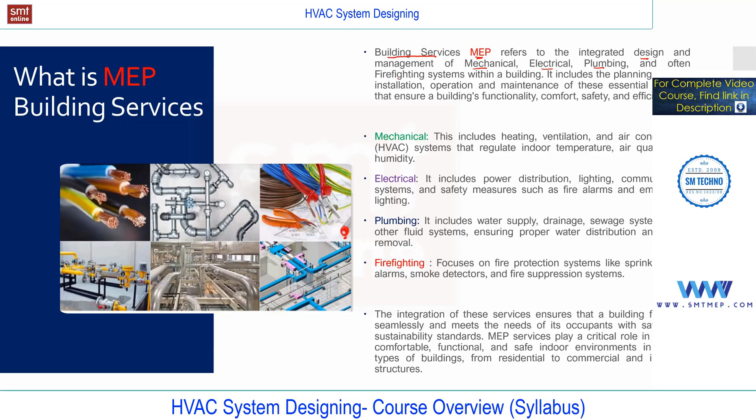So I'm going to share the screen. You can read MEP on the screen. In short, we used to call MEP mechanical, electrical, and plumbing, or building services. This building services, in short MEP, refers to the integrated design and management of mechanical, electrical, plumbing, and also the firefighting system. It includes the planning, design, installation, operation, and maintenance of this essential system to ensure the building's functionality, comfort, safety, and efficiency.

For example, if you talk about any building without these services, there is no use of the building. For example, a building without electricity, or just visualize a building without the plumbing system. So these services are very, very important for the building. In short, we used to call it MEP.

It's a building services, and under this you'll find four services. One is mechanical, under mechanical you'll find HVAC. In short, we used to call HVAC heating, ventilating, and air conditioning. E is for electrical service; under electrical you'll find lighting, power, and alarm, emergency lights, etc. Then P stands for plumbing, so in plumbing you'll find water system, drainage system, fixtures, and lot of things. So altogether we used to call this MEP, total four services combined together.

Now listen, this is important. If you're learning HVAC, you are learning a part of MEP. As a mechanical person, it's recommended to start with HVAC, and as electrical, it's recommended to start with electrical. Later, electrical people also get involved in mechanical services, and mechanical engineers also get involved in electrical services, for coordination. The reason is all these services are for the building, so the electrical engineer must coordinate with the mechanical engineer and vice versa, and all this is linked with the architect. Who is the architect and how the process goes in actual practice, we'll discuss in chapter 1.

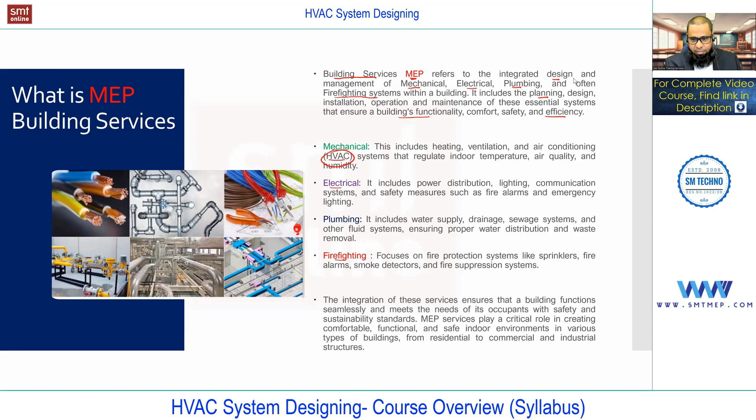In the next slide you will find information related to HVAC. HVAC in short, we used to call it heating, ventilating, and air conditioning. And if you talk about HVAC, you'll find different societies like ASHRAE, ISHRAE, and you'll find carrier, SMACNA, and a number of options. When we start the course, we'll talk about these standards also. HVAC stands for heating, ventilating, and air conditioning.

This is used for what? To control the indoor environment conditions. At this level, I'm just giving general information; in detail we'll discuss in chapter 1, starting with the definition of air conditioning. HVAC refers to the technology and systems used to control indoor air environment or conditions, including temperature. We maintain parameters that include temperature, humidity, and air quality. Under air quality, you'll find velocity, distribution of air, noise level, etc. You'll find a number of parameters that we'll discuss in chapter 1.

This is just an introduction for various buildings and structures. This HVAC is not only for residential; this HVAC system is for residential, commercial, and no doubt industrial. And not only for human comfort, this is also for process control. So you'll find a number of applications for air conditioning, for example in residential projects, commercial projects, as well as industrial, and especially in process controls you'll find this HVAC.

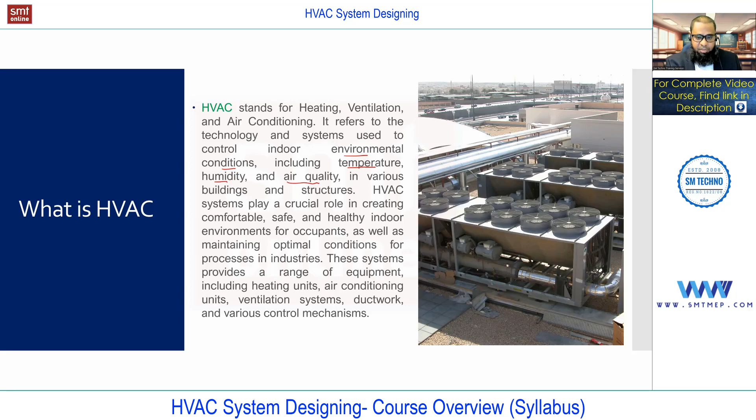Okay, so this is just a quick idea. As I said at the beginning, in this session you're going to learn what you're going to learn in this training program. I'll give you a brief idea about the syllabus.

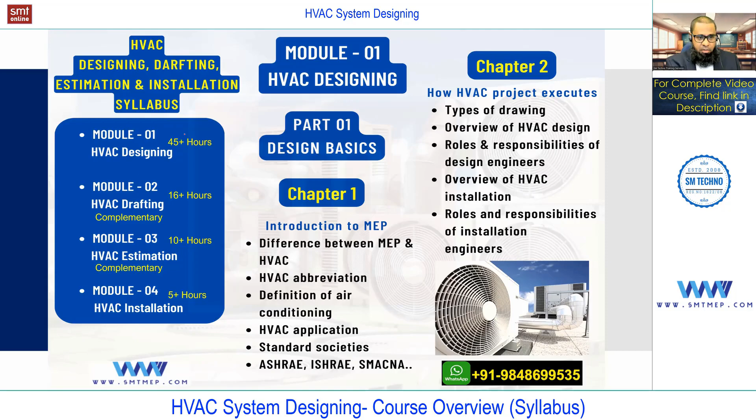Now, if you talk about the modules, this course is divided into 4 modules. You see module 1, I'm considering as HVAC design, which is for 45 plus hours, the major part of this training program. And module 2, I'm considering HVAC drafting, including AutoCAD. It's around 16 plus hours, 7 hours of AutoCAD and 9 hours of drafting. And this we are offering as complimentary, and this is complimentary even for others, not only for you.

You can find out on our website. So this is the video mode. And module 3, I'm considering HVAC estimation, and this also 10 plus hours with the complete tower project step by step with the notes and detail, including this design review software. And this also you'll get in the video mode, and this also we are offering as complimentary.

And this HVAC estimation course you'll get after completing this design. Why? Because in order to deal with the material takeoff, nothing but HVAC estimation, you must have the idea about the systems like ducting system, piping system, etc., the equipments, terms and terminology. Then only you can think to extract the information. So that's the reason we are offering this HVAC estimation course after completing the design part, in the video mode again.

Next, module 4, I'm considering installation. This is of 5 plus hours. This also you'll get in the video mode.

So what are the topics in this designing? I'll give you the idea so that you can get the idea what you're going to learn in this training program. This is very, very important. So you see, this HVAC designing, module 1, is divided into 5 parts. Part 1 is basics, which is very, very important from a design point of view.

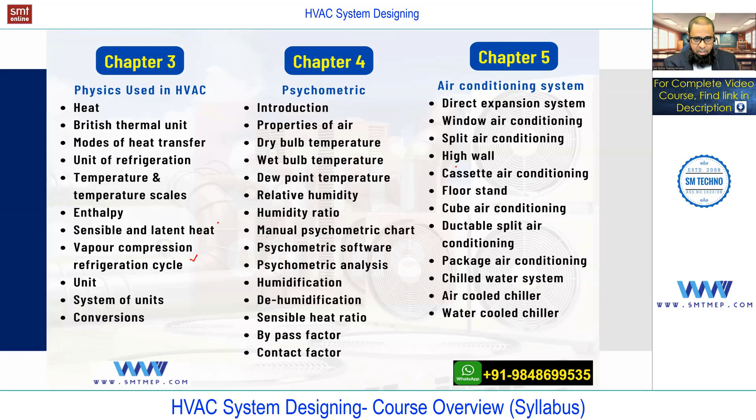And this concludes part 1, module 1. Okay, so as I said, let me quickly repeat. Module 1 is for designing. Under that, you'll find a total of 5 parts. Part 1 is the basics up to chapter 5. Module 1, part 1 includes chapter 1 to 5, and chapter 5 covers all the systems: DX system, chilled water, as well as all-air conditioning system.

Next, in part 2 of module 1, we'll talk about manual load calculation, manual cooling as well as heating load calculation, which is very interesting and important and a bit lengthy also. So part 2 I'm considering manual load calculation, cooling as well as heating. This is interesting and at the same time a bit lengthy and very, very important.

Without this manual load calculation, you cannot think to deal with the software load calculation, because in manual load calculation you're going to get the concept, and with the concept only you can provide the correct input when using the software, say HAP software, as per the syllabus, because software will provide you the result based on the user input. If you provide the correct input, you'll get the correct result. If you provide the wrong input, you'll get the wrong result. And giving the input in software requires the concept, and the concept for load calculation you're going to get in the manual load calculation. So this is very, very important and lengthy.

It starts with chapter 6, which is building survey. In building survey, we are going to learn what information needs to be extracted to prepare the input file to start the load calculation. We'll find n number of parameters to discuss, like latitude, longitude, psychrometric condition, elevation, levels, construction material for finding the U value. That means reading the architectural layout, extracting door information, window information, material used in the construction to calculate the actual heat gain, etc. Extracting this information in the building survey, we will prepare a file called the input file.

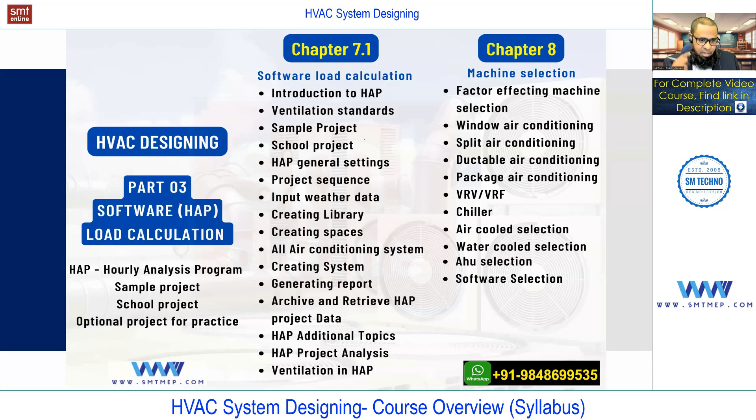school project. Okay, so chapters 7.1 and 8 under part 3 I'm considering for the software calculation. So this is about part 3 of module 1. Next, part 4, I'm considering HVAC air side, all about the air side, including the duct design, terminal selection, duct accessories, duct fittings, different methods for duct designing like equal friction method, velocity reduction method, constant velocity method, and static regain method, which is used for high velocity long run ducts. Okay, so all this I'm considering in part 4.

For example, you see, we'll start with the SMACNA standard, then initially you'll find the theory like duct material, duct gauges, duct fittings, duct accessories. Then we'll talk about the duct designing. We'll start with the aspect ratio, very, very important from an interview point of view. Then we'll deal with the different methods for duct designing.

Most commonly in actual practice, you'll find equal friction method, and the equal friction method with the charts and tables from SMACNA, or you can use from Carrier or ASHRAE. The end result is going to be same. And then again, the equal friction method using duct sizer, which is simple compared with the manual calculation. Then in chapter 9.1, we'll talk about the occupied zone, then air distribution, then selection of air terminals, a lot of things. So all this part 4 I'm considering as air side.

Part 4 air side, you'll find fan selection. This is also very, very important. Under the fan selection, we'll discuss ESP calculation in detail, again with the sample project. Then we'll also discuss the exhaust system. This also I'm considering air side because the exhaust, toilet exhaust, kitchen exhaust, or car parking exhaust system, all I'm considering in air side because it's an air side system. So all you'll get in part 4.

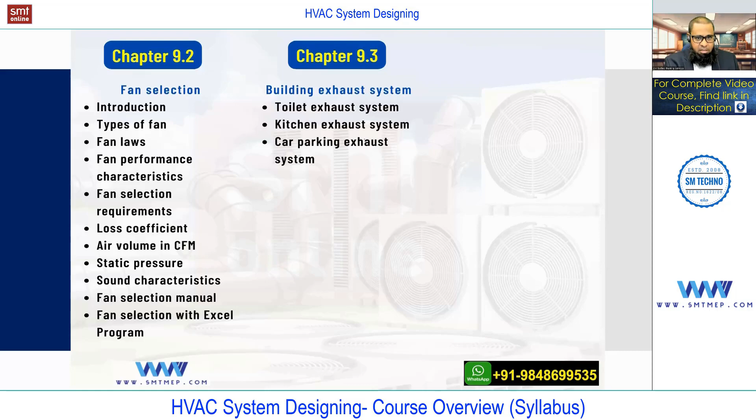Now, if you talk about part 5 of module 1, I'm considering water side, water system. Water system means I'm talking about the chilled water side. It can be for air cooled chiller or it can be for water cooled chiller. So different types of pipe, different material, then the arrangement like direct return system or reverse return system. Then no doubt pipe designing. Again in pipe designing, first we'll deal with the manual chart from ASHRAE or from Carrier. The end result is going to be same.

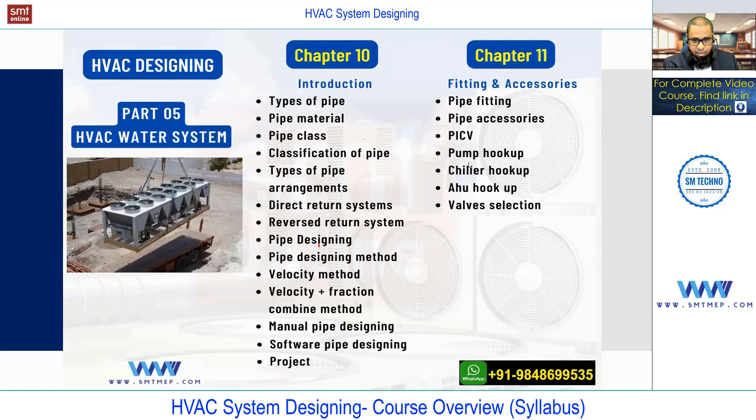Then the same example, I'll proceed with the pipe sizer. Most commonly in actual practice, you'll find McQuay pipe sizer. Then we have different methods for pipe sizing like velocity method or ASHRAE method, velocity plus friction, etc. So in chapter 11 of part 5, you will find fittings and accessories. Different fittings, different accessories, which is very, very important from an interview point of view. We used to call it a valve package, or we can also call it hookups. Again, this chapter 12 is important for the pump selection. So pump selection also I'm considering in part 5.

You see, different types of pump, different pump laws, then how to design or how to select the pump, how to find out the head calculation with an example, with a sample project. Again in pump selection, first we'll deal with the manual calculation, then the same using an Excel program, because in actual practice to save time we are using an Excel program. So once you know the concept manually, using Excel is going to be simple.

Primary pump or secondary pump, or the different systems like primary only system or primary plus secondary, or you may find primary plus secondary plus tertiary. So you'll find the different systems related to pumps. So all about pump selection, different types of systems related to pumps, you'll find in part 5 under chapter 12. And in chapter 12.1, which is also a part of part 5, you will find the cooling tower selection, makeup water tank, expansion tank, air separator, etc.

Okay, so the cooling tower is for water cooled chiller. Makeup tank, again water cooled chiller, even for air cooled side also, but limited capacity. Then expansion tank sizing, again for both chillers, air separator, etc. So this I'm considering an advanced topic that you'll also find in part 5 of module 1. Okay, so these are the total 5 parts of module 1, which comes under designing. So module 1 I'm considering as HVAC designing. Okay, so the major part of this training is the designing side.

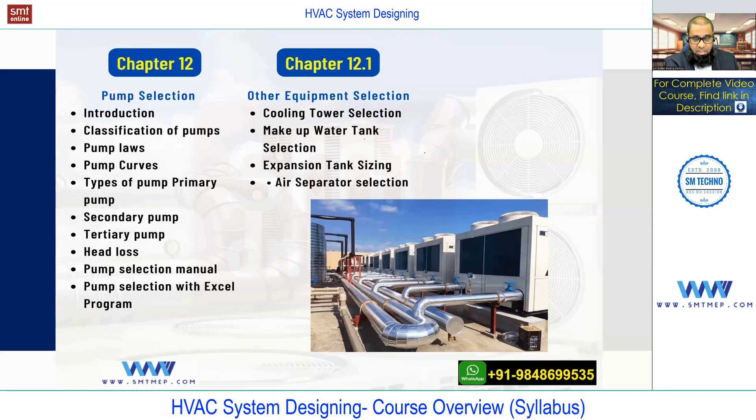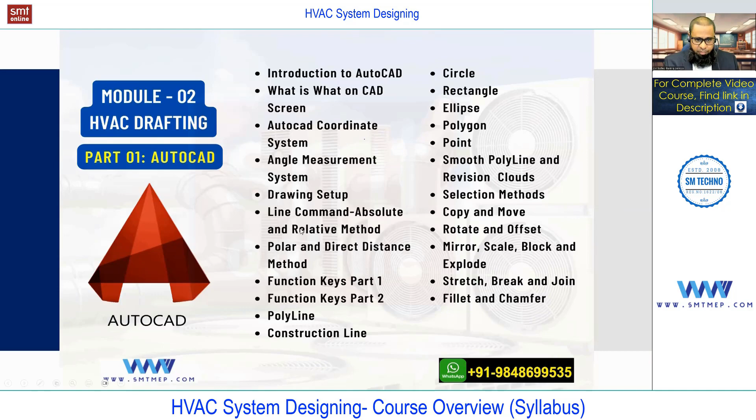Next, if you talk about module 2, I'm considering part 1 and 2 in module 2. Part 1 is AutoCAD, how to draw, and part 2 I'm considering HVAC drafting, what to draw. Okay, so you can read all these topics. I'll share this presentation with you after the session. You can just spend some time and read all the topics so that you'll get the idea what topics you're going to get in this.

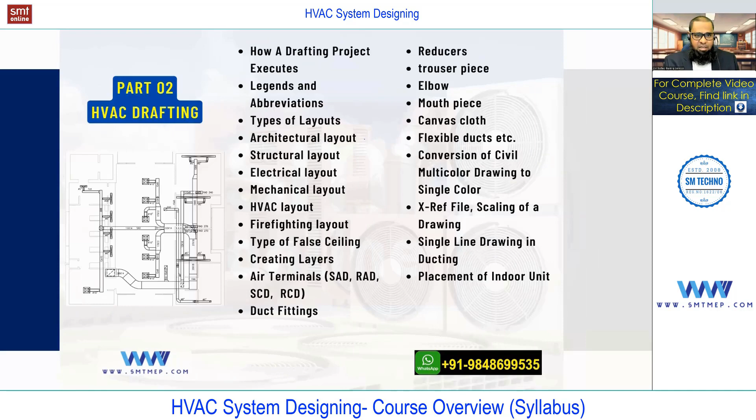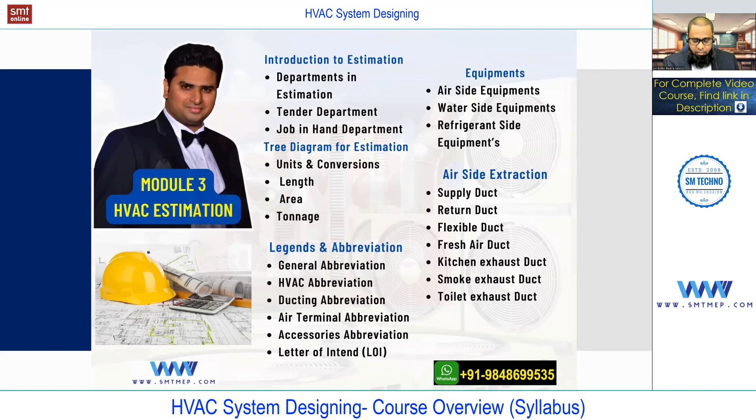Next, module 3, I'm considering HVAC estimation by Mr. Habib. He works as an HVAC estimation engineer in Kuwait, and he will offer this tower project, and that too in video. And the estimation also covers the complete tower project. It's a total of 24 floors. And in this you'll also find the notes data, including that project file in DWF format with the Design Review software. So you can go through all these topics once. After the session, I'll share this presentation with you.

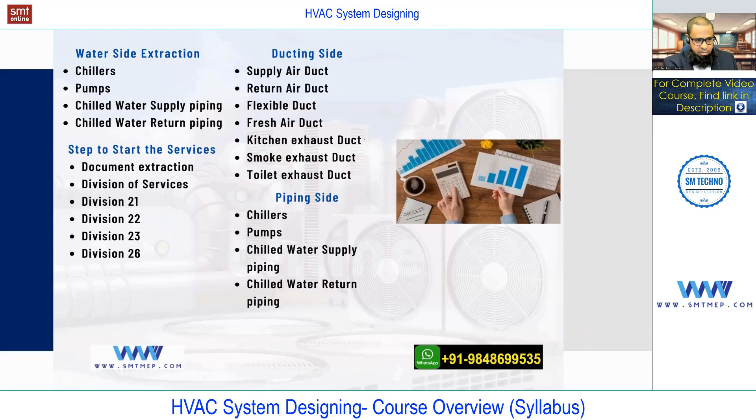In this estimation you'll also find the air side and water side extraction, and the different system equipment, etc. Next, module 4, I'm considering HVAC installation. In HVAC installation, you will find installation of chillers, AHU, FCU, duct installation, pipe installation, pipe insulation, duct insulation, etc.

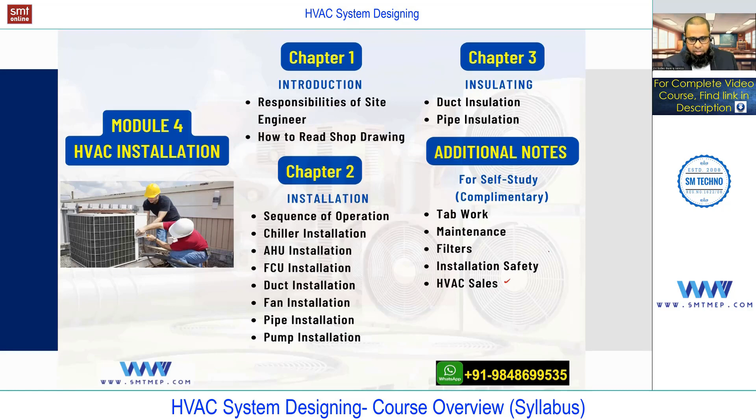Okay. Apart from this, you'll find some additional notes for self-study, like TAB work, maintenance, filters, safety, and sales. Okay, so these are complimentary self-study notes we'll provide with this training program. So you're going to get the complete package. That includes 4 modules. Module 1 is a designing module, so it's one complete package for this HVAC course. Find it on the screen. Module 1 is designing, which consists of 45 plus hours of live training.

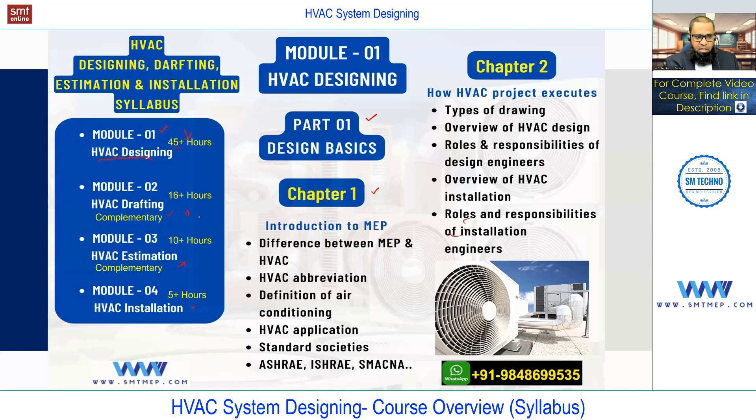Module 2 is HVAC drafting with AutoCAD, 16 plus hours, complimentary. And module 3 is HVAC estimation, 10 plus hours, including the tower project. And module 4 is HVAC installation. Okay, so it's a complete package that includes designing, drafting with AutoCAD, estimation, and installation. So if you're working on the design side, the installation knowledge will help. Or if you're working on the execution side, the design knowledge will help you take decisions.

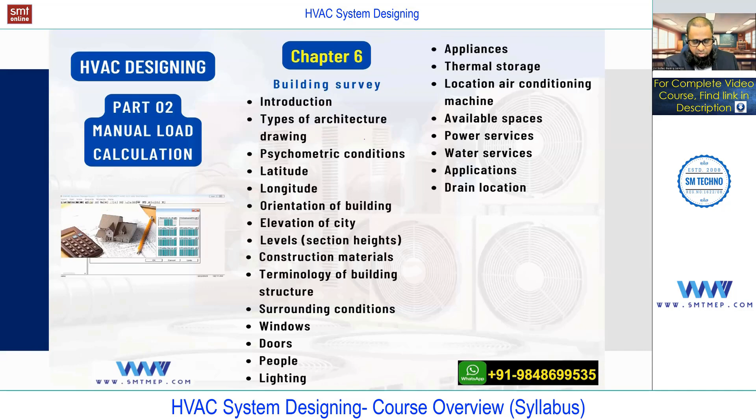And if you're working in the estimation division, definitely this estimation course is enough to start work as an estimation engineer. And no doubt drafting will help draftsmen, but as an engineer, drafting will help you extract the data at the time of load calculation and make minor changes as per the requirement. Even as an engineer, you should know AutoCAD, but not like a draftsman. At least you should know the basics. But I cover AutoCAD 2D in detail, and you'll find the drafting part for air side as well as water side.

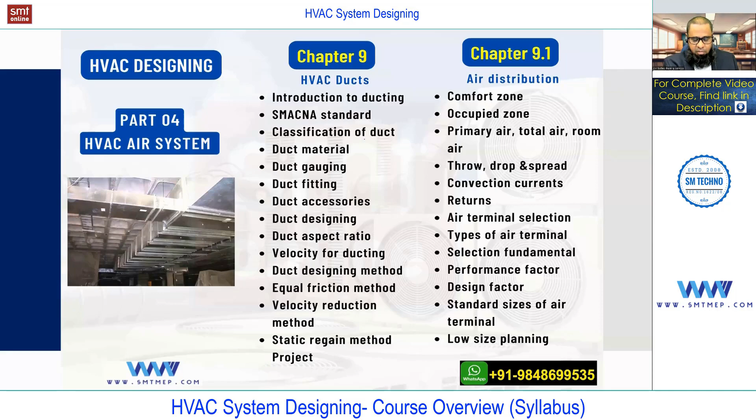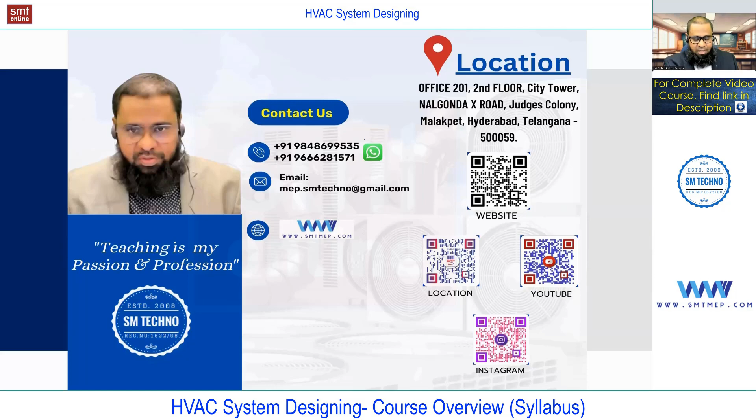And you see, people have confusion between MEP and Revit MEP. Revit MEP is advanced software from Autodesk which works on the BIM concept to design building services. So if you know MEP, then you can think of Revit MEP, because Revit MEP is the next level. As mechanical, if you know HVAC design, you can think of dealing with Revit. As electrical, if you know electrical design, you can think of dealing with Revit. But directly learning Revit is not at all recommended, and we will not offer it either. So if someone asks for Revit, first we'll confirm whether they know the services or not.

So Revit MEP is software from Autodesk that works on the BIM concept to design building services. So if you know the design of building services, then using the software called Revit, you can design the services. So at the time of learning Revit, you can focus on the software with the knowledge of these services.